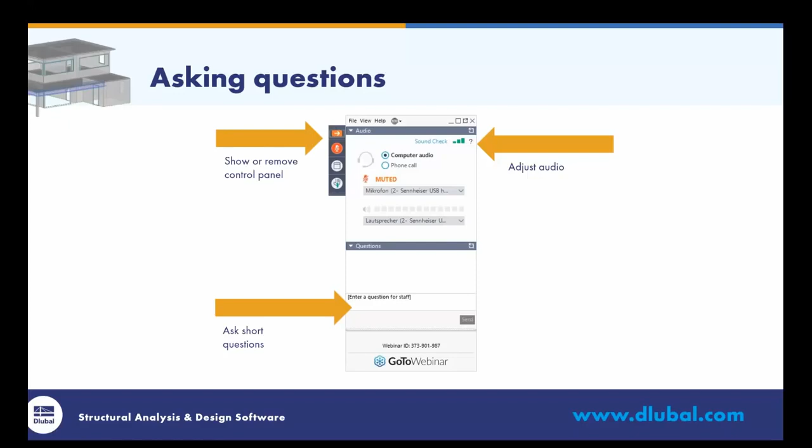So what possibilities do we have for concrete design in RFEM? The first is a big module called RF-CONCRETE. It's actually 2 modules, RF-CONCRETE Surfaces and RF-CONCRETE Members, because of different design concepts. And the member design is also available for RSTAB. Then we have RF-CONCRETE Columns, which does a column design using the method based on nominal curvature, which is also available for RSTAB.

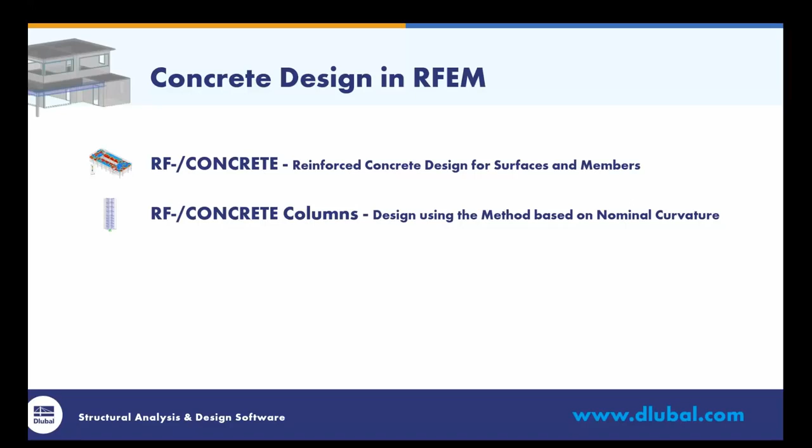Then we have the module RF-CONCRETE Deflect, which is actually an add-on for RF-CONCRETE Surfaces. The next thing would be RF-CONCRETE NL for nonlinear, which can do a physically and geometrically nonlinear calculation of reinforced concrete beams and plate structures. For RSTAB, this is already included in the concrete module. And later on, I will show you designs in the marked modules.

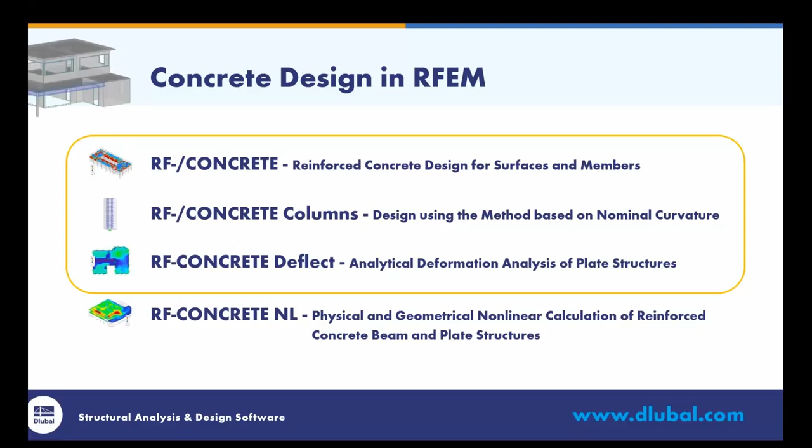What else do we have? We have RF-PUNCH Pro, which does a punching shear design of foundations and slabs with nodal and line supports or columns and walls respectively. Then we have RF-FOUNDATION Pro, design of single bucket and block foundations, which is also available for RSTAB. And the last is RF-TENDON, for the definition of tendons in pre-stressed concrete members, and the corresponding module for tendon design, for a pre-stressed concrete design according to Eurocode 2.

As we have now covered the modules, we can go into the example. You see this building we have prepared. It's completely made from reinforced concrete. We have slabs for the roofs and above the ground floor. Then we have walls for the horizontal bracing. We have some downstand beams to take up the forces from the slabs, they are defined as ribs. Then we have this lintel above a window in the first floor as a result beam, which can integrate the internal forces of the surface into this beam and then be designed as a beam, as a member. And then we have some columns to carry the beam. Of course, we also have some loads.

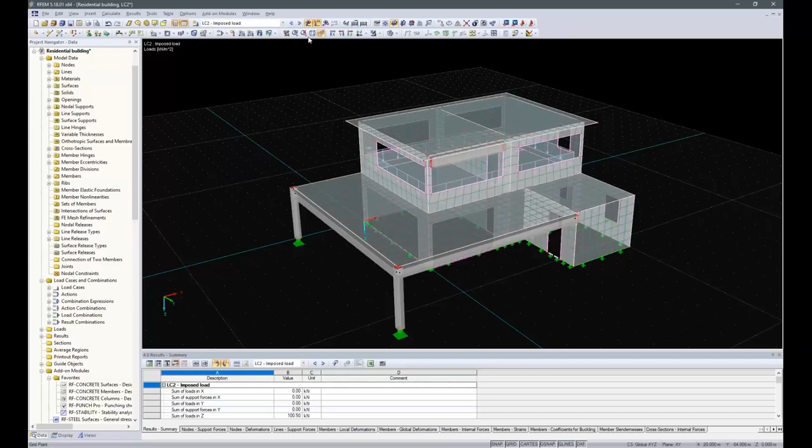We have already done that before because that would be too much for this webinar. We have some self-weight loads in load case 1. We have imposed loads on the internal floor over ground floor. Then we have snow loads on the roofs, wind loads in -x and +y direction.

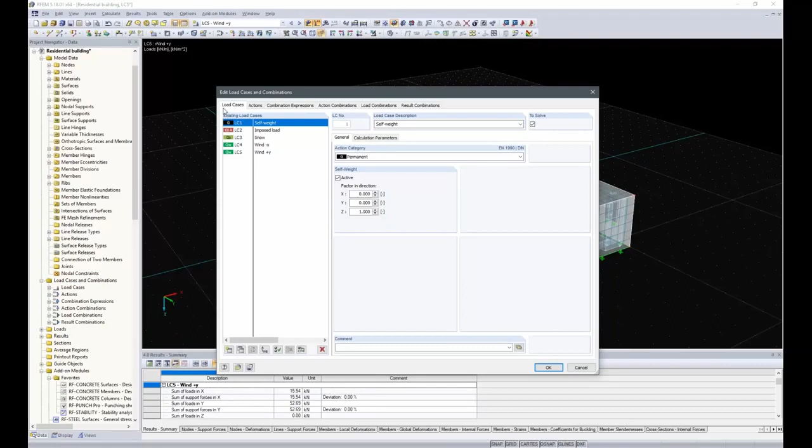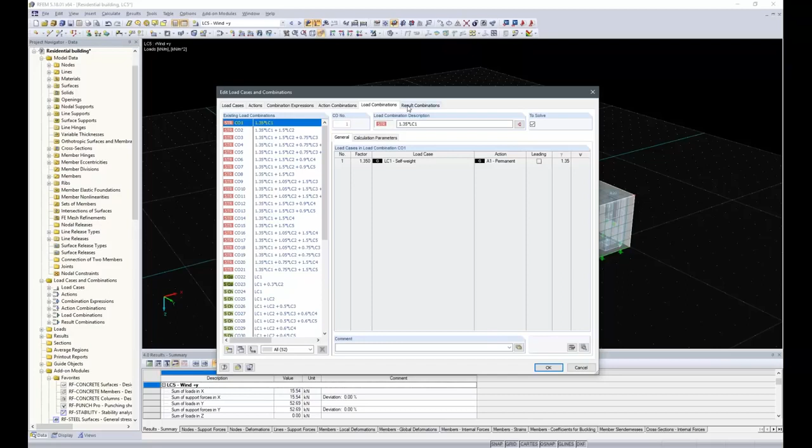So we go into the combinations. You see the load cases, which are then automatically combined, and at the end we get some load combinations for the serviceability limit state and for the ultimate limit state, which are then summarized in 4 result combinations for different design situations for the ultimate limit state and for serviceability limit state characteristic, frequent and quasi-permanent loads.

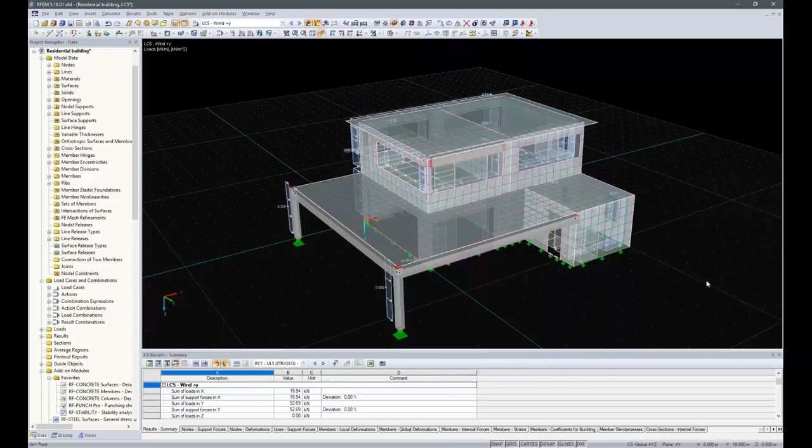Okay. Before going into the design, we will have a quick look at the elements to be designed. First will be the lintel above the window in the first floor. Double click on that to get to the Edit Member window. Here we see the cross-section is a rectangle with 18 centimeters width, because the thickness of the wall is 18 centimeters, and 50 centimeters height, from the top of this window to the bottom edge of the slab.

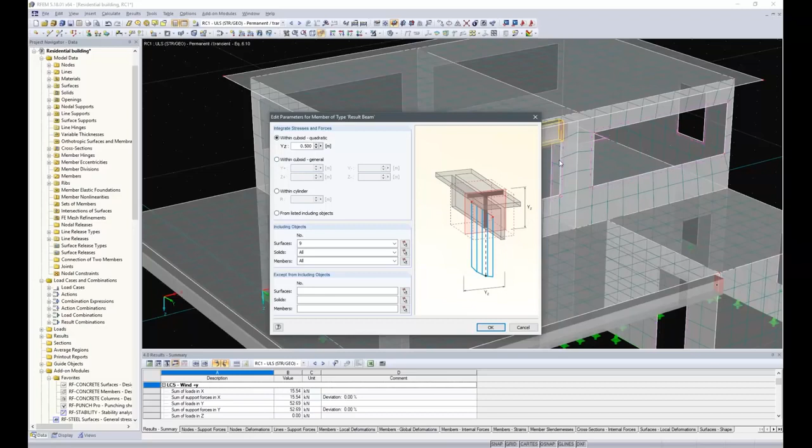And we look into the parameters for the result beams. Here we can edit the parameters and tell the program what to integrate into this result beam, which stresses to integrate. Here the forces come from surface number 9, and in this case with a quadratic cross-section for the integration area. Okay. One more thing, we added an eccentricity to this result beam because it was originally made at the top edge of the window, and so we moved it up by 250 millimeters using this eccentricity.

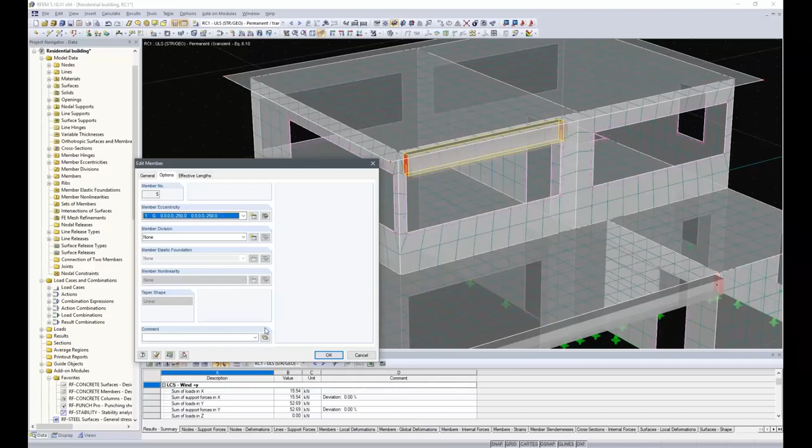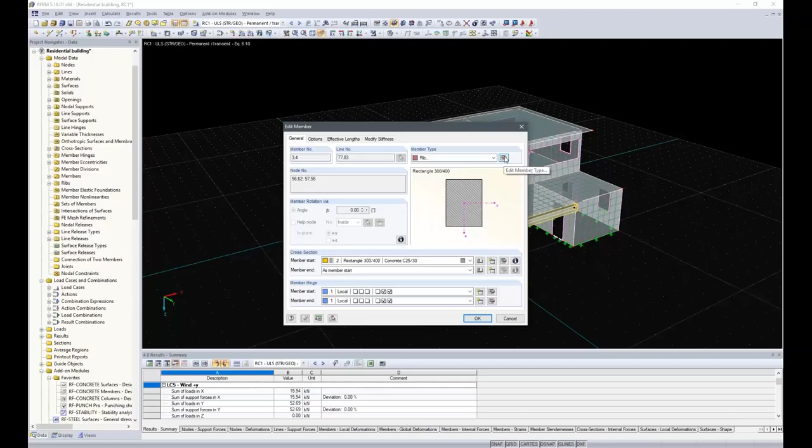Okay. Then we look at the ribs. Here we have a cross section of 30 by 40 centimeters. Concrete is our standard C25/30 concrete according to the Eurocode. And the member type rib also needs some more inputs.

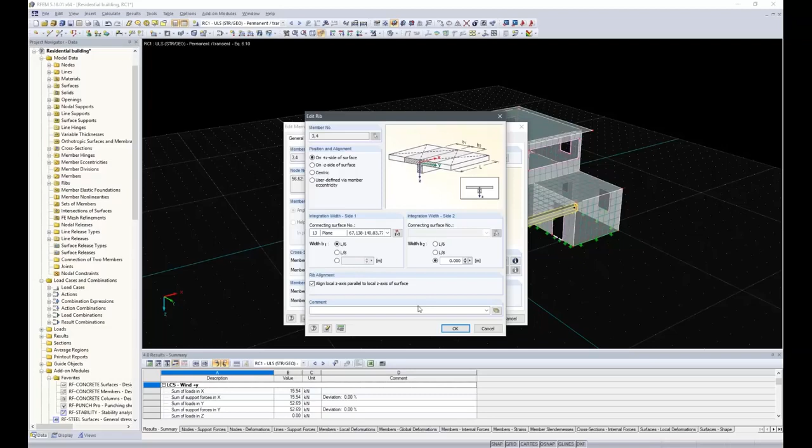We have to define the position of this rib. It has to be on the plus Z side of the surface as per definition in the general data of the model. And the definition of the integration width is supposed to be 1/6 of the length of the member. So L/6. And since it's always on the left side of this beam, it also has to be just on one side. Okay.

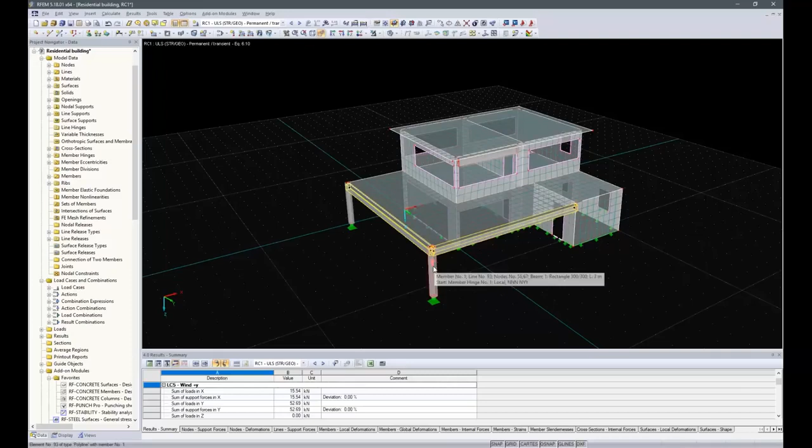So much for the modeling. The columns are on nodal supports and the walls on line supports. That's it so far. Then we can go into the module of concrete surfaces. Double click in the data navigator gets me there. At first I have to select the design standard. Here we want to use the Eurocode 2. We have a couple more standards, and we use the National Annex for Germany, DIN.

Then we have to select the loads for the design. For the ultimate limit state, we use the result combination number 1. And for the serviceability limit state, it's a little more difficult. We use result combinations number 2 and 3 for the characteristic and frequent loads, and we use load combinations number 22 and 23 for the quasi-permanent loads, because the deflection analysis needs an unambiguous position of the loads, which can't be achieved with using result combinations, and that way we have to use the load combinations.

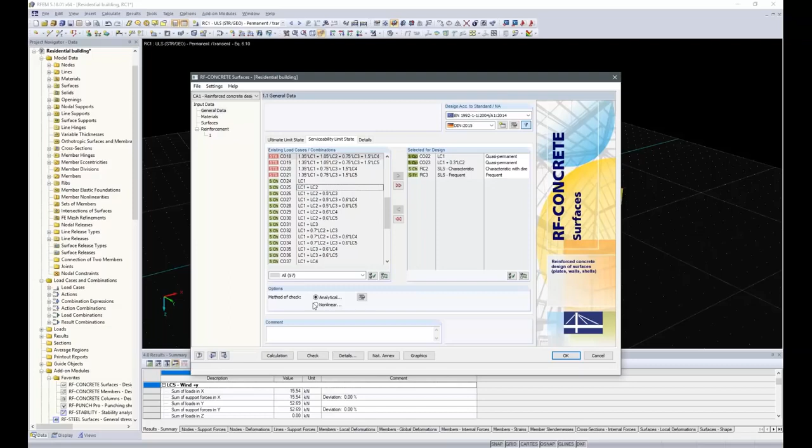Then for the serviceability limit state, we do an analytical design. It's also possible to do a nonlinear design, which takes a little longer, so we stick with the analytical design. Here we can edit the settings for this design and tell the program which checks to do. We want to do crack check, steel stress check, and we want to have a look at the deflections using the add-on RF-CONCRETE

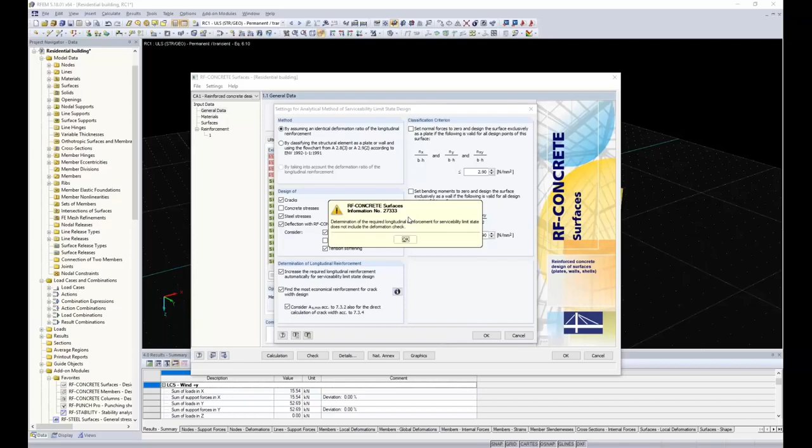Deflect. I check that, and I get a warning message that the required longitudinal reinforcement for the serviceability limit state does not include the deformation check. So for the deformation, you have to add reinforcement by putting in higher basic reinforcement, or even go with bigger dimensions for the slab. Okay, we also consider shrinkage and click OK. Then we go into the materials, table 1.2.

Here you see the concrete C25/30 that is taken over from RFEM, and we have a couple of different reinforcing steels, always depending on the standard you're using. Here we stick with the default reinforcing steel B500S, and go on to the next window, surfaces 1.3. We have various options for also more or less unusual design situations, and we will not cover them all in detail. I'll just give you a quick overview over what we can do. We just keep the defaults for creeping and shrinkage.

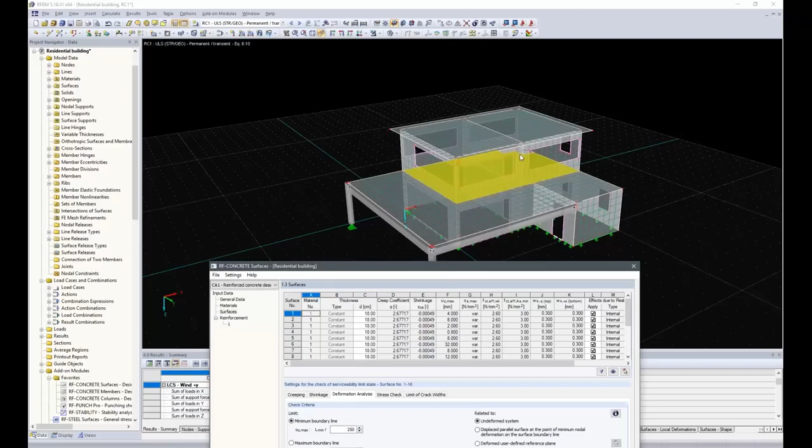We have to have a quick look at the deformation analysis, because here you can go wrong regarding the design ratio. Since here the default value is using the minimum boundary line divided by 250, and since the shortest boundary lines are back here, it makes it a little difficult to get a correct ratio, because this is very small. So we go with a user-defined relative limit and define a length of the shorter dimension of our two-way slab, which has a length of 5 meters, which is then divided by 250, and that is our limit for the deflection design. So that's a lot better.

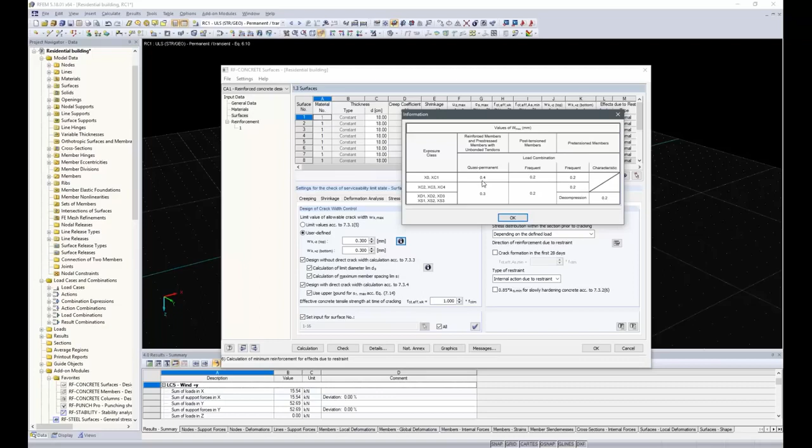Then we go on to the stress check, and we just keep the defaults here. Next is the limit of the crack widths. Here we want to use a user-defined limit. Click on the info button and get a small table. We have an exposure class XC1, and for reinforced members with a quasi-permanent action we use 0.4 millimeters. So we can enter that. Then we want to do the design with a direct crack width calculation using the equation 7.14. And also we want to consider the restraint, in this case with the approach of a bending restraint, because the slab is mostly exposed to bending.

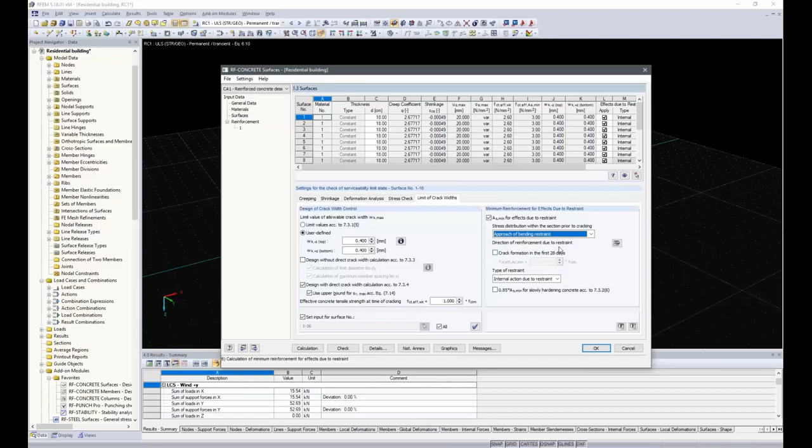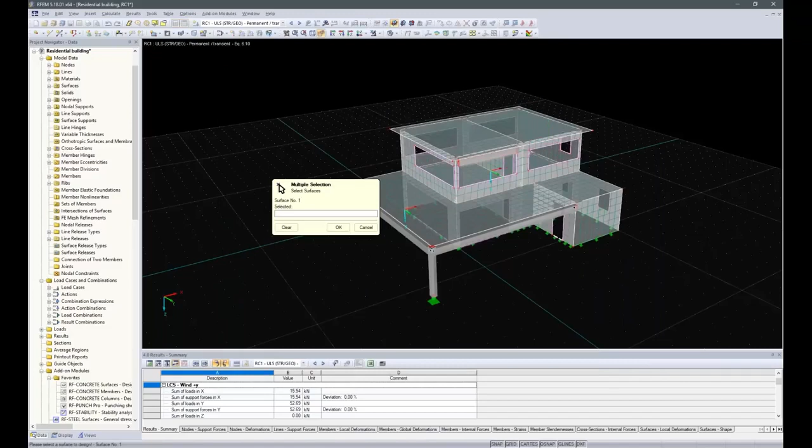Then we can go on to 1.4 reinforcement. Here we have to select which surface we want to design. In this case, it's just supposed to be the internal surface over the ground floor. This one. Click OK, and now the reinforcement ratios are already pre-selected to match the standard, so we don't touch that. Then we can have a look at the reinforcement layout. We want to have the concrete cover for the reinforcement according to the standard, using the exposure class XC1 for top and bottom, and get these minimum covers for both directions.

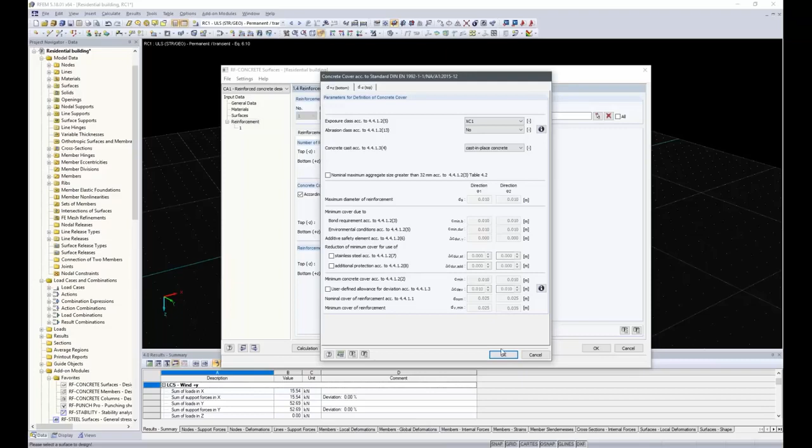Okay, and we go to the next tab, longitudinal reinforcement. Here we have the possibility to enter a basic reinforcement for the whole slab. Also, it's possible to use the required reinforcement for the serviceability design, which we are going to do in this example.

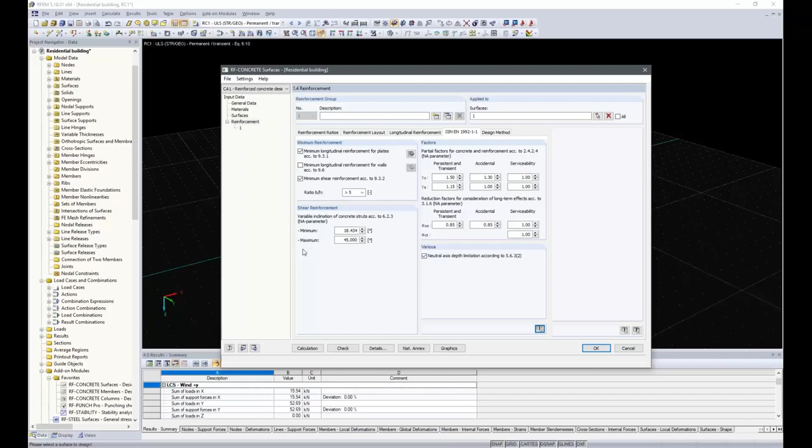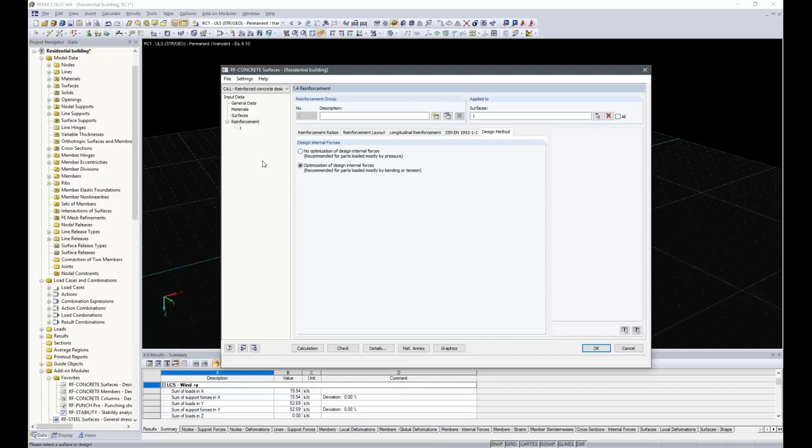Now we can go on to the next tab for the standard. Here we check if we want to use a minimum reinforcement for plates or walls. In this case, it's for plates. The partial safety factors for the concrete and the reinforcement, and the inclination of the concrete struts, all according to the national annex. And the last thing is the design method. For this example, we want to use the optimization of design internal forces because our slab is mostly loaded by bending. If we have walls, for example, it's not recommended. Okay, we are done with the inputs and can do the calculations.

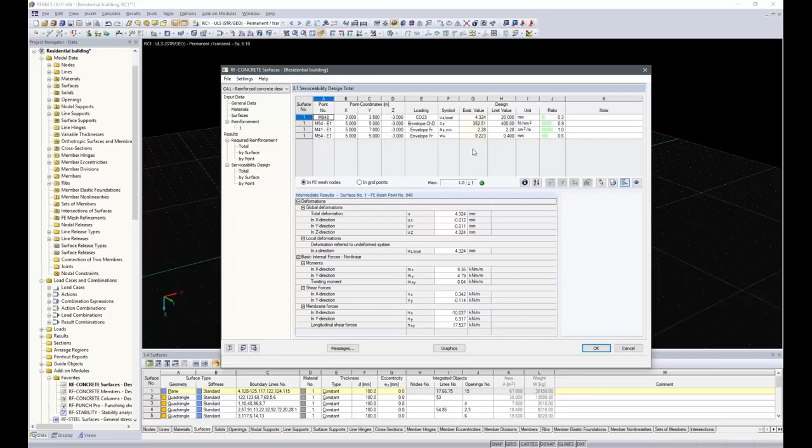Okay, if we want to see some more, we go into a visibility mode to just see the slab. Now we see the crack width. But first I want to have a look at the reinforcement.

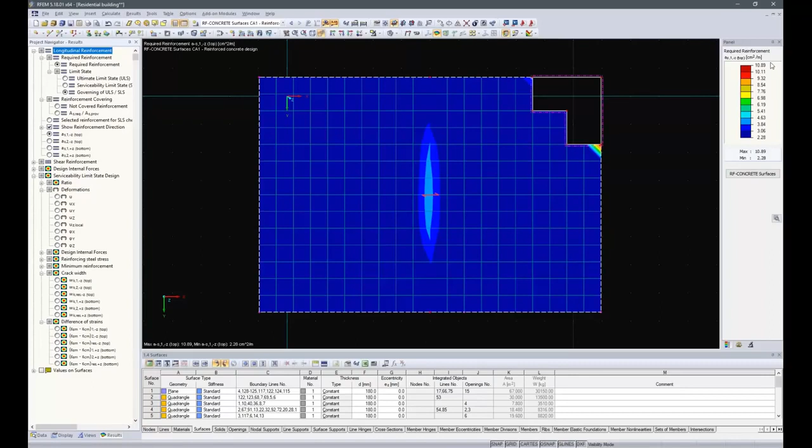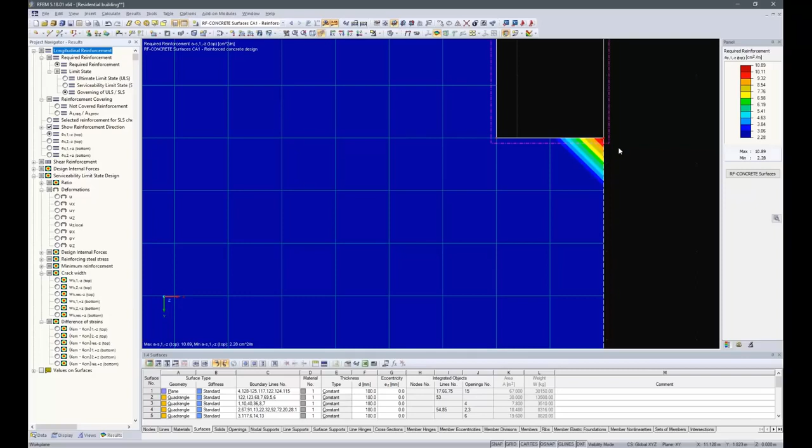For the top reinforcement, we get quite high values of up to almost 11 square centimeters per meter, but this is just in this one corner, so it's probably a singularity. You can find articles on how to deal with singularities in the knowledge base on our website. I'll show you at the end of the presentation where you can find that. In the other direction, we have the same problem in a different corner, but with the right means, you will be able to cope with them.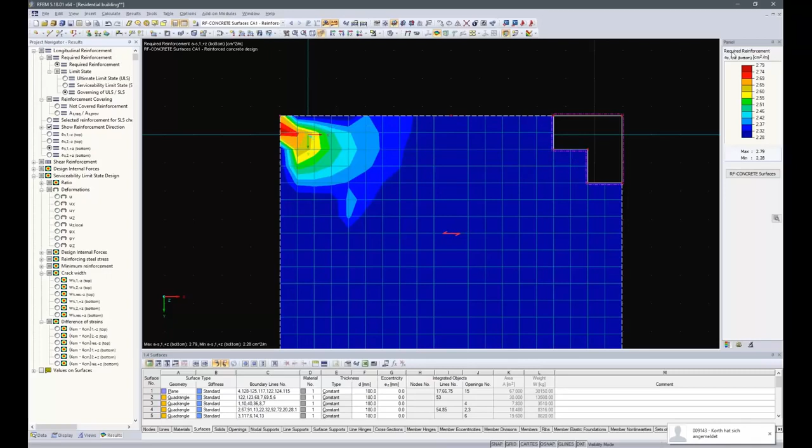Then on the bottom, we have not even 3 square centimeters per meter in both directions. Here is even a singularity, so you can do with a quite small basic reinforcement and cover all the required reinforcement.

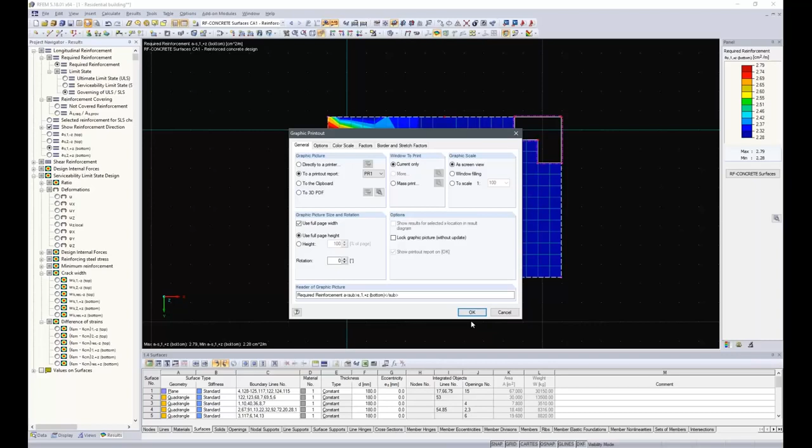For example, it's possible to print this graphic into the printout report using this button up here, print graphic. Then you can select where to print it, either directly to a printer, to a 3D PDF, to a printout report, or to the clipboard to use it in another program. And you can select how you want to print it, with this color scale, with factors, and so on. So just go ahead and experiment with that to get the right thing for you. Oh no, I didn't want to make a printout report now, but I want to go ahead

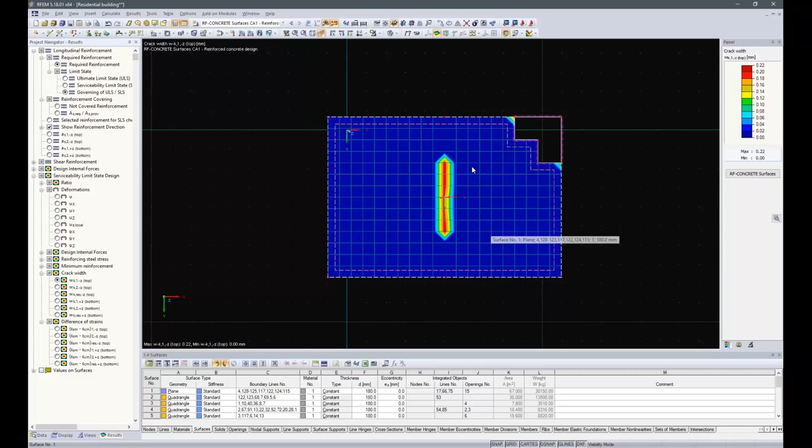and have a quick look at the crack width. The maximum crack width is on the top of the slab over the wall, so this is what I expected, but since it's way below the maximum value, it's still fine. The other directions are even smaller, and on the bottom we don't have any cracks, so that's fine.

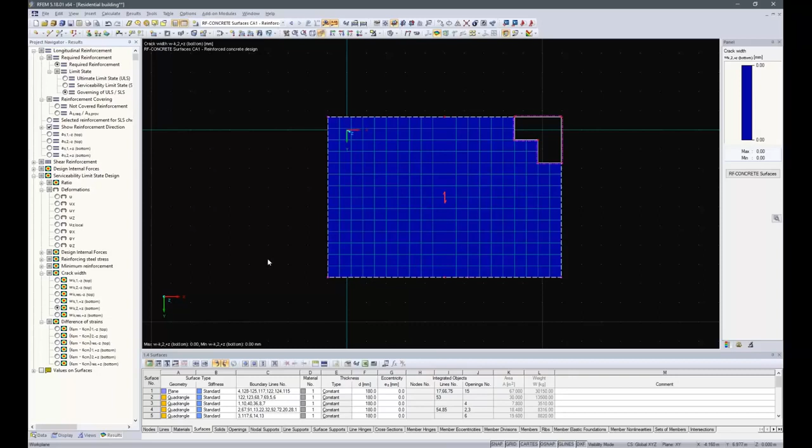So that's been a short insight into the module RF concrete surfaces, and we go ahead and look at the module RF concrete members.

So again, we have the general data. Looks pretty much like in RF concrete surfaces. We have to select the standard. We use again the Eurocode with the national annex for Germany. Then the result combination number 1 for the ultimate limit state. Result combinations 2 and 3 for the serviceability limit state, and combinations 22 and 23 for the deflection.

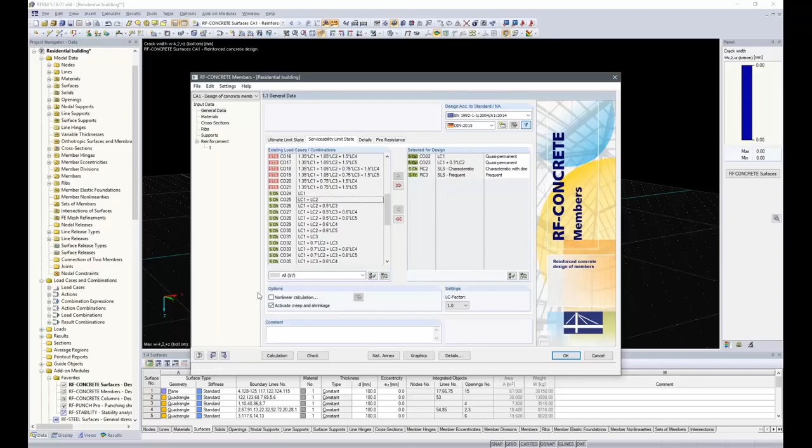We want to activate creep and shrinkage for the calculation, and we don't want to do a nonlinear calculation, so we leave that out and go on to the next window, materials, again taken over from RFEM, so we can just skip through that.

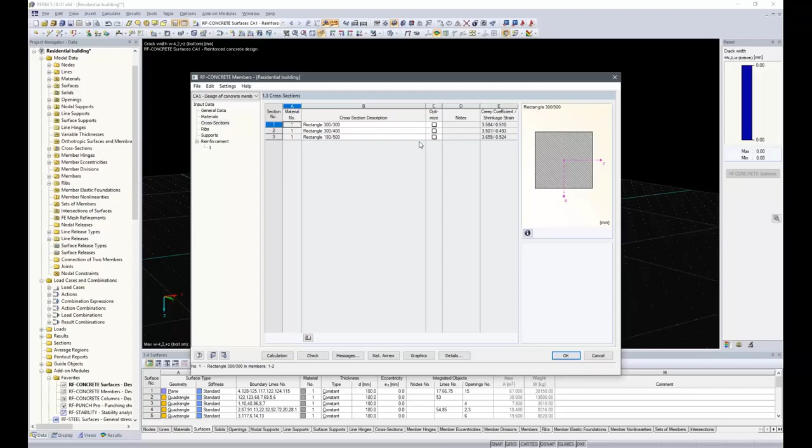To the cross sections, here you can change the cross sections if you need to, if you want to. You can optimize it, let the program optimize it for you, and you can modify the creep coefficient and the shrinkage strain.

The same goes for the ribs. You can also modify creep coefficient and shrinkage strain, and you can modify the effective width for the ribs.

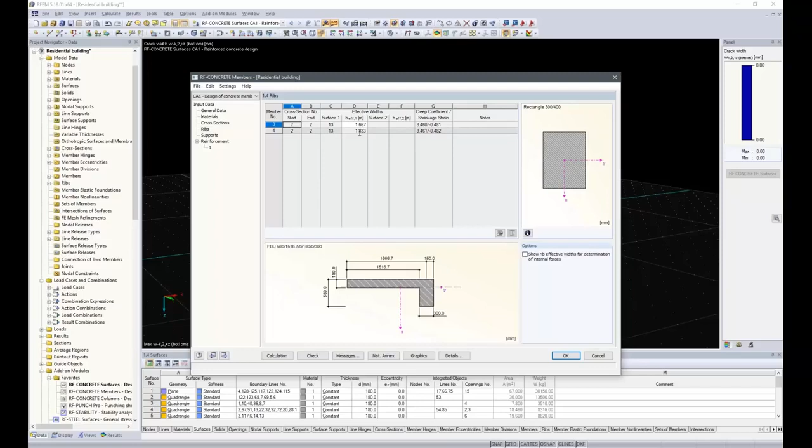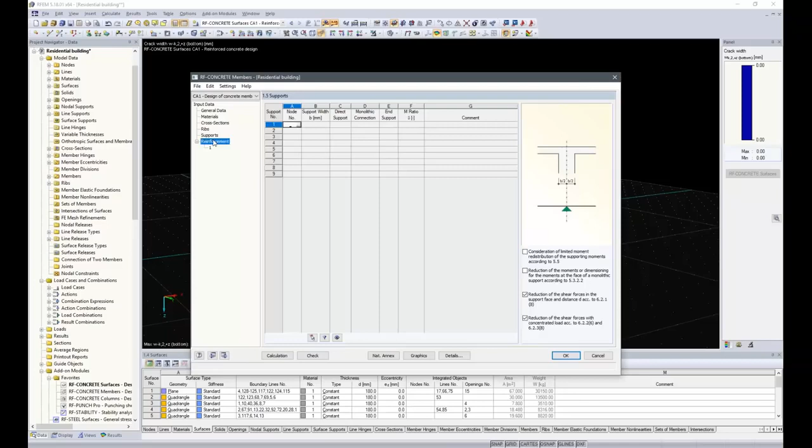The next would be inputting the supports for the beams. They have to be done if you want to do a moment redistribution or you want to do moment reductions over inner columns, for example. Or if you want to reduce the shear forces according to the standard, then you have to input supports. We're not going to do that now to get quickly through that.

And then we get to 1.6 reinforcement and have to do some additional inputs here. At first we make a reinforcement group for the ribs, this one and this one, edge beams, and we want to select the corresponding beams, this one and this one, 3 and 4, and give them something to do. Okay, the possible diameters for these ribs will be 16 and 20 millimeters. These two beams are going to be quite densely reinforced, so we give them another layer of reinforcement bars.

Also, it's possible to add some curtailment to optimize the design, but we are not going to do that in this example. We go ahead to the stirrups. Here the possible diameters will be 8 and 10 millimeters.

Here it's possible to define the stirrup spacing related to zones subdivided according to spacing, or with a self-defined spacing, but we stick with the uniform spacing throughout.

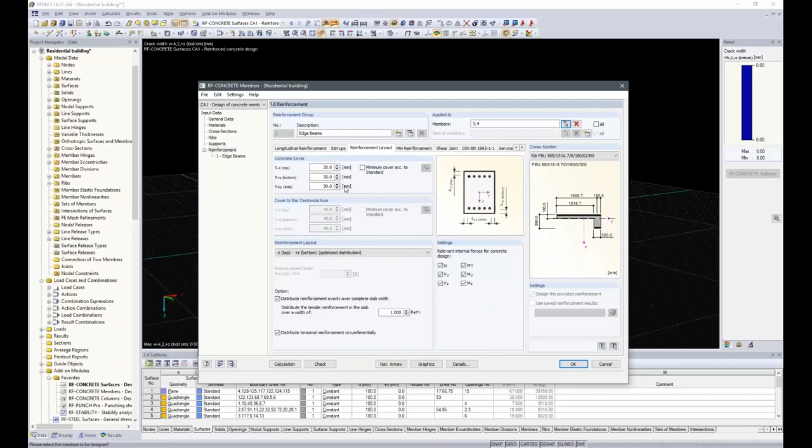Next is the reinforcement layout. Like before in the surfaces, we go with a concrete cover according to the standard and can select the exposure class. In this case, this is XC4 for exterior building elements with direct rain, so this is a lot more minimum cover for the reinforcement. Same goes for the top and for the sides.

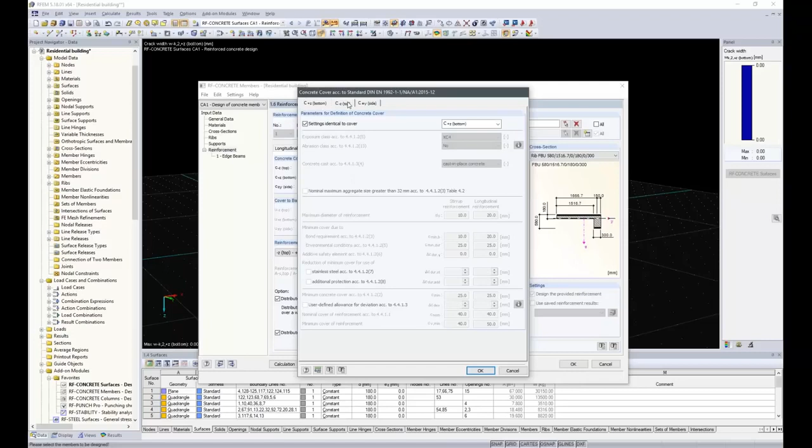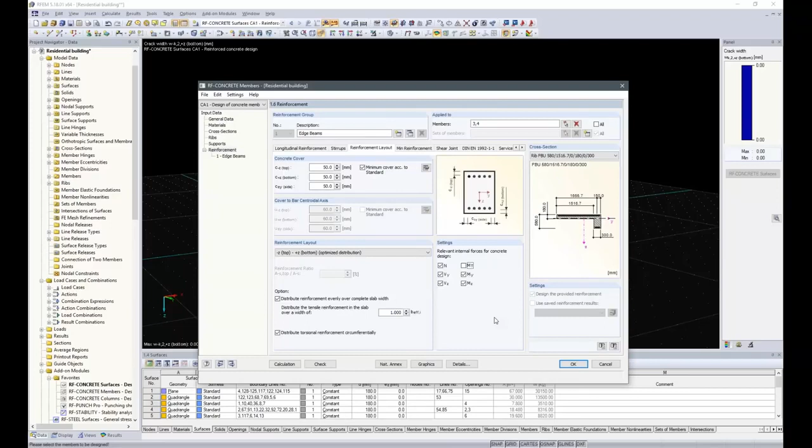Okay, we leave the reinforcement layout itself alone, and we turn off the torsional moment, because here we have only compatibility torsion, which doesn't have to be taken into account according to the standard. Then we go on to the next tab, minimum reinforcement.

Here we can define if we want to use minimum longitudinal or shear reinforcement, and if we want to have a certain amount of reinforcement, we can also define that up here. Then we want to have a shear joint for the design.

The slab, for example, comes as a prefabricated ceiling with 30 millimeters support on the beam. So again, just on the left side, like in the picture on the right, it's 30 millimeters and a rough surface. And we also want to design the flange connection of the segmented cross sections.

The next is again the code, the settings for the code. We leave that according to default and go on to the serviceability.

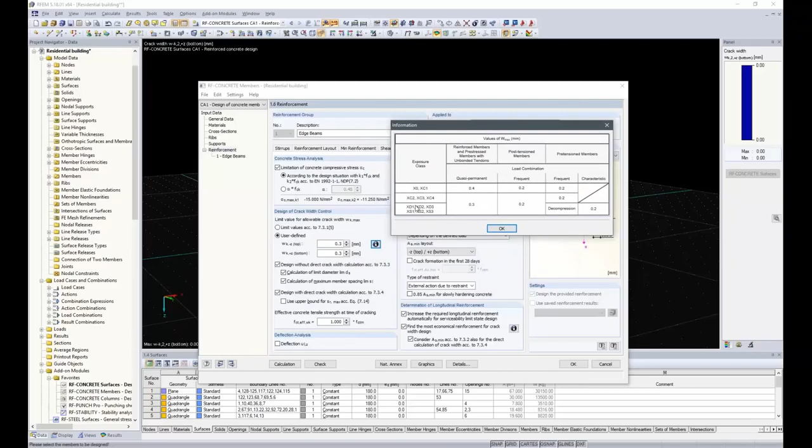Here we want to do a design for the concrete stresses, for the steel stresses. We want to do a crack width design, again manually defined. It's XC4 now, so we have to use 0.3 millimeters maximum crack width, which is already entered.

And we want to do a direct crack width calculation using equation 7.14. Also, we want to do a deflection analysis, and we want to get a minimum reinforcement for effects due to restraint.

In this case, depending on the defined load, the minimum reinforcement layout is supposed to be on the tension side. And of course, we want to increase the required longitudinal reinforcement automatically.

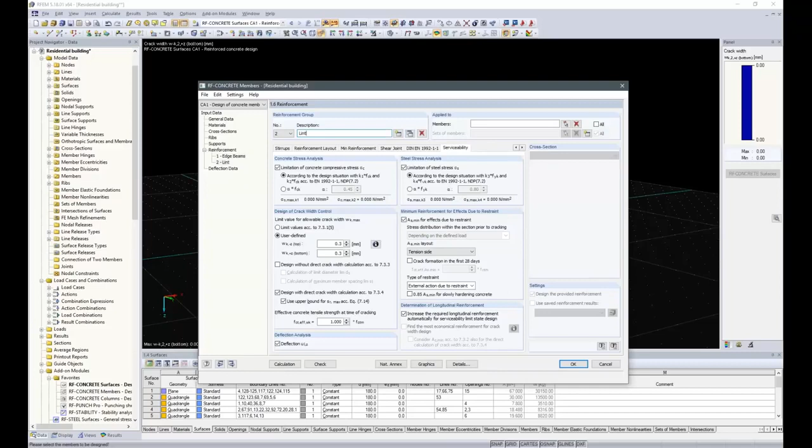Next, we define another reinforcement group for our lintel. For doing that, we just copy the current reinforcement group, call that lintel, and select this beam, number 5.

The only thing we have to change is that we can't do a deflection analysis for this result beam, because this result beam doesn't have an own stiffness and is not coupled to the system. So this is a small limitation concerning the result beam, but on the other hand, it's quite a handy tool.

So we turn that off, and we want to have a little smaller possible diameters for this lintel, because the loading is much smaller and it's much shorter than the edge beams.

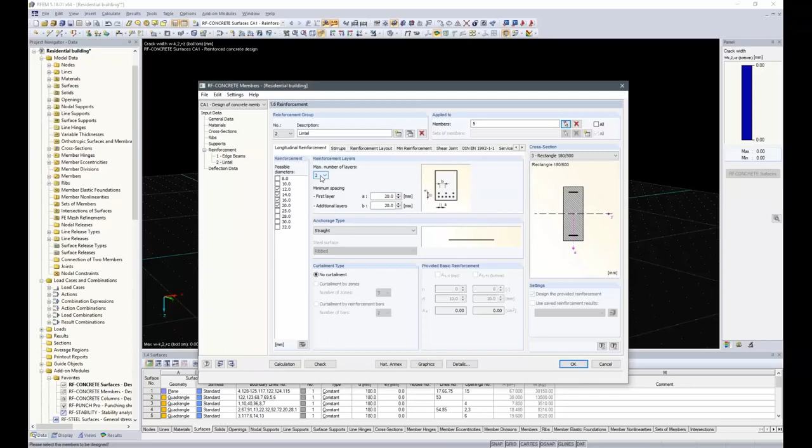The last thing we have to enter in this module is the deflection data for members number 3 and 4. For the edge beams, distance between supports is automatically recognized, and the limit value is length divided by 250. We can go on with that and start the calculation.

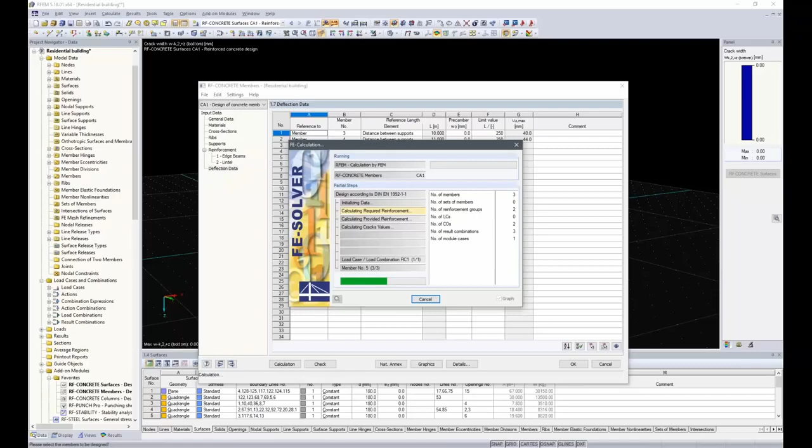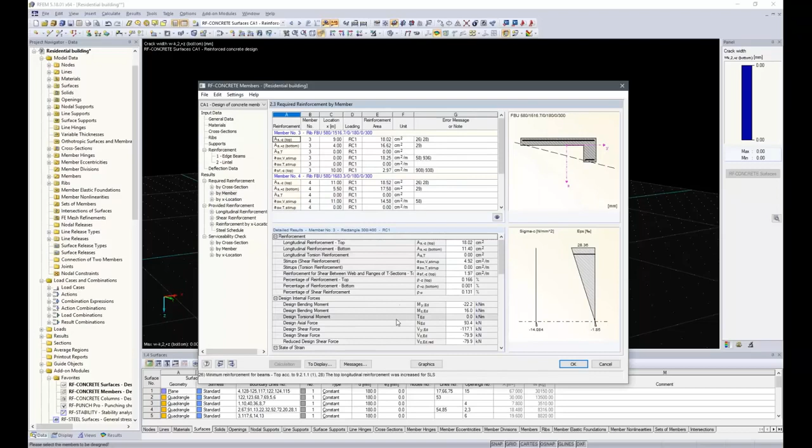Okay, now we get required reinforcement by cross-section, by member, always with detailed results in the bottom box, and we get provided reinforcement. In this case, we have the shear reinforcement for the different members.

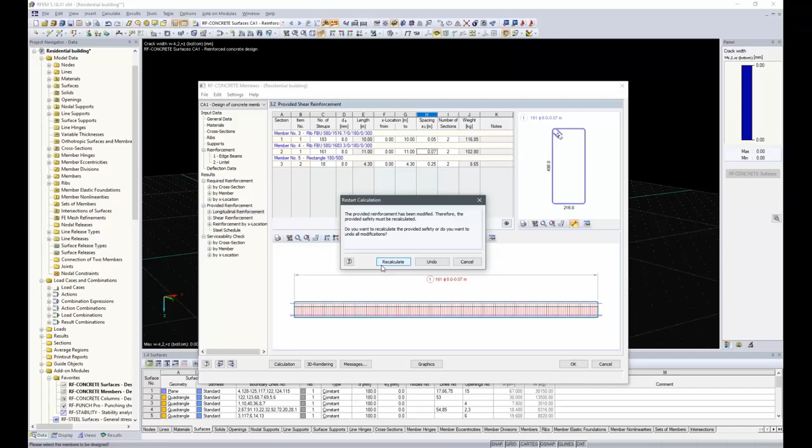Now the program asks me to recalculate the module with the new reinforcement to prove that the design is still valid. So I recalculate that, and now I can see that this has changed. I have 2 more stirrups, and it's now like I wanted it beforehand.

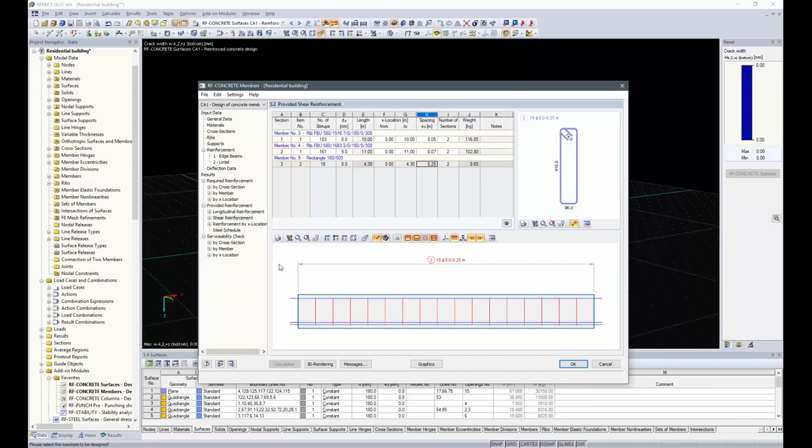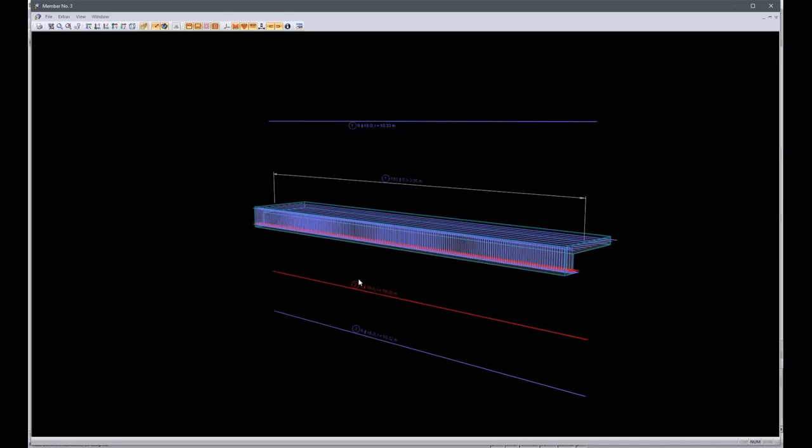I go into the longitudinal reinforcement and see that it's quite a bit of reinforcement. If you double click on the graphics in the module, then you get this bigger window. You can also print that graphic.

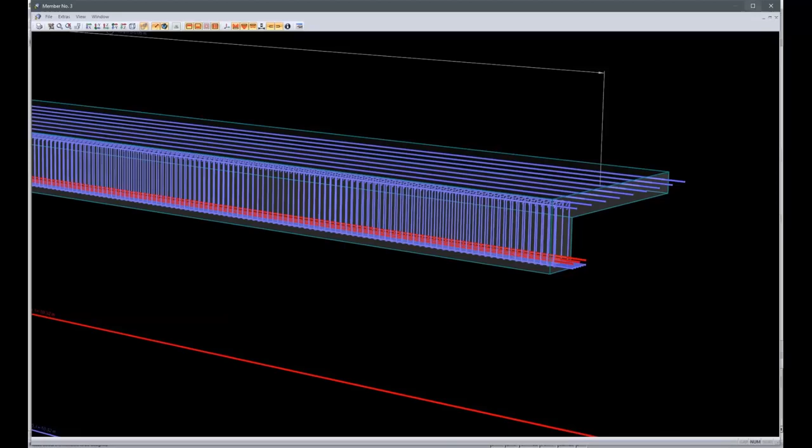You can edit the reinforcement just as you need it. You can even copy it, delete it, do anything you need. You can do the same in this window up here in this table, although that might be a little more difficult because you don't see what you do. That's why it's maybe better to use this graphics window.

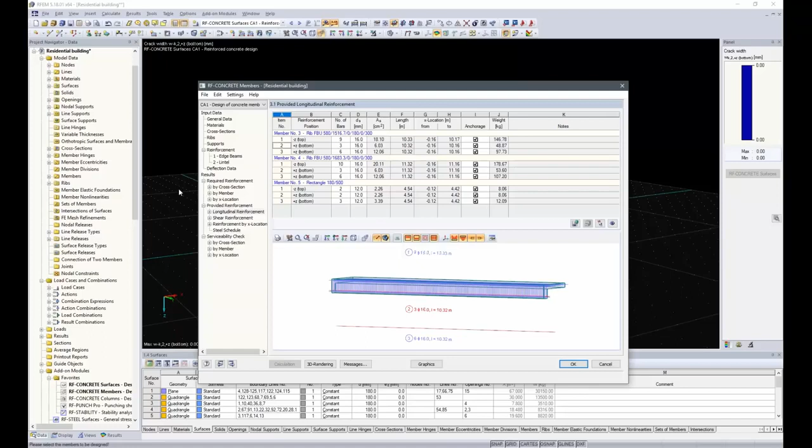Okay, I go into the serviceability check. All the required checks are okay. We are at 98% maximum capacity, so this is actually quite good design, meets the requirements. Just so it's okay.

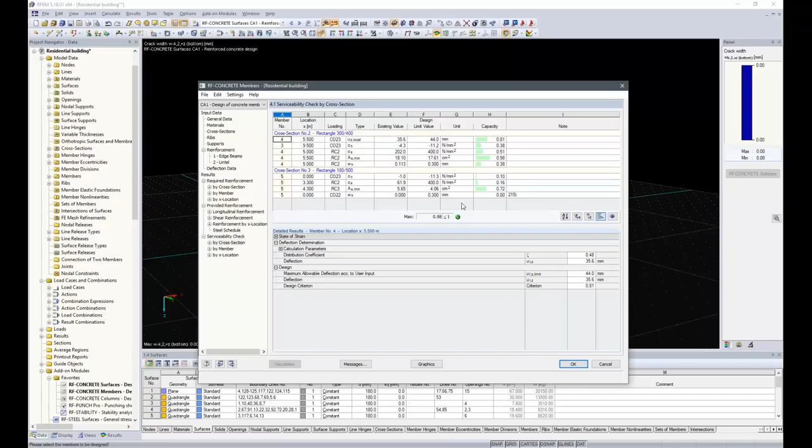And then we can look at the results in the graphics window. You already see it here. Let's pick some just that member and look at that more closely.

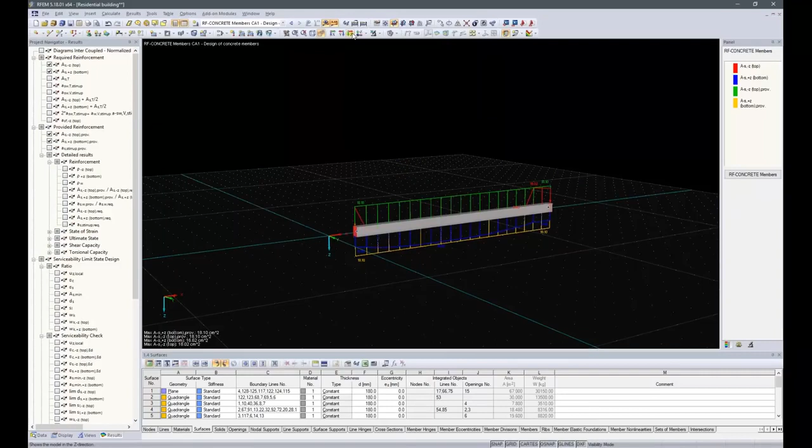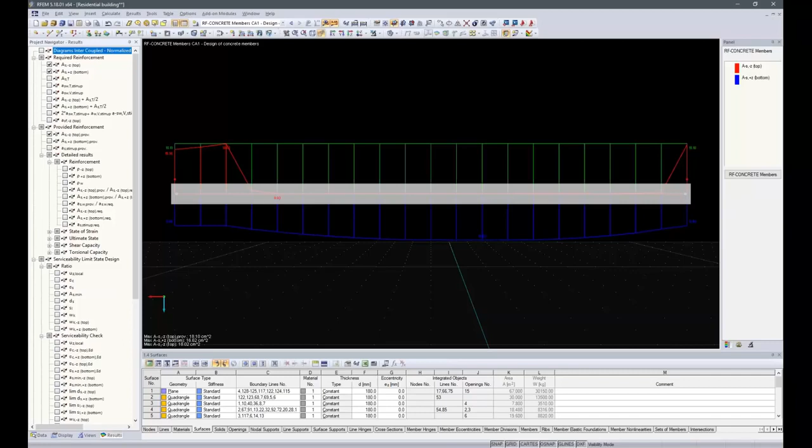Okay, I turn off the provided reinforcement. Now we get the required reinforcement with maximum for the bottom reinforcement in the middle, which is just as I expected, and the maximum values for the top at the ends. So that's also as expected. And then now we can again add the provided reinforcement, and it's just a little bigger than the required reinforcement, so this is okay.

Without the curtailment, I get the same reinforcement over the whole length of the beam. This could of course be changed in the module, enter curtailment, and optimize your design.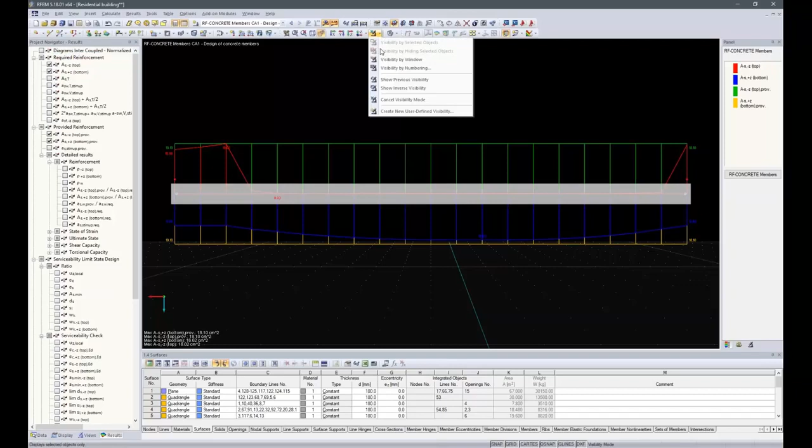So that's been a quick look into the member design. I go back to a view of the full graphics, cancel the visibility mode, show the whole model, and go into the column design.

Next module - again, all the modules are similar, so you get used to that very fast. First I have to select the members in this module, and I can click on all. Only the vertical members are recognized as columns by the program, so only members 1 and 2 are selected for design. I have to select the design standard, again Eurocode 2 with a German annex.

For these columns, I just have to do an ultimate limit state design, but I have to select a creep-producing permanent load. That would be, for example, combination number 23 with the self-weight and a part of the imposed load for the quasi-permanent load.

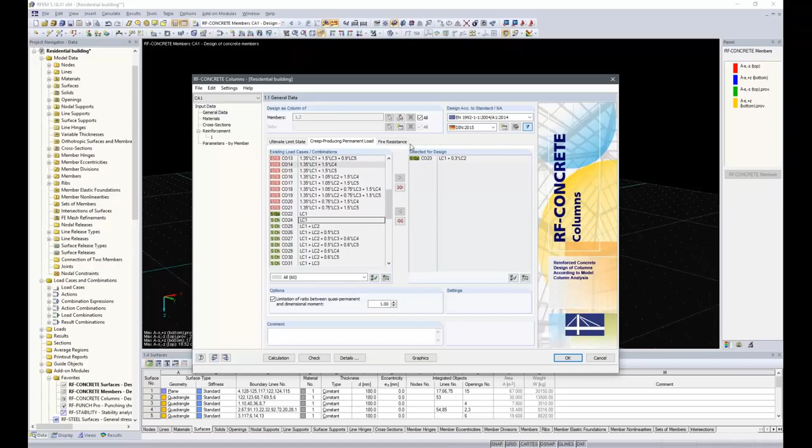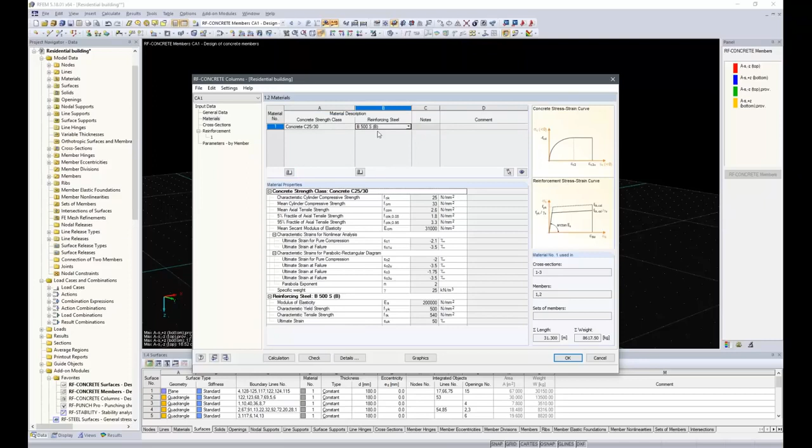It's also possible to do a fire design, but we're going to skip that for this example. I go on to the materials, and same as before, concrete is taken over from RFEM, reinforcing steel can be selected. We go on to the cross sections.

Again, I can change the cross section in here and have to give it back to RFEM later on. I can change the creep coefficient, and I go to 1.4 reinforcement.

Here it's again similar to RF-Concrete Members, and I want to have possible diameters from 12 to 16 millimeters. I want to have a uniformly surrounding reinforcement layout. Everything else can be left as it is. For the stirrups, I use 8 or 10 millimeter diameters.

Anchorage type hook, and 2 legs is okay. I can define secondary reinforcement, although this user-defined maximum reinforcement distance comes from the standard - Eurocode 2 - that's defined in there.

And then I can go for the reinforcement layout. Here I want to have the cover according to the standard again, so XC4 for exterior building elements with direct rain.

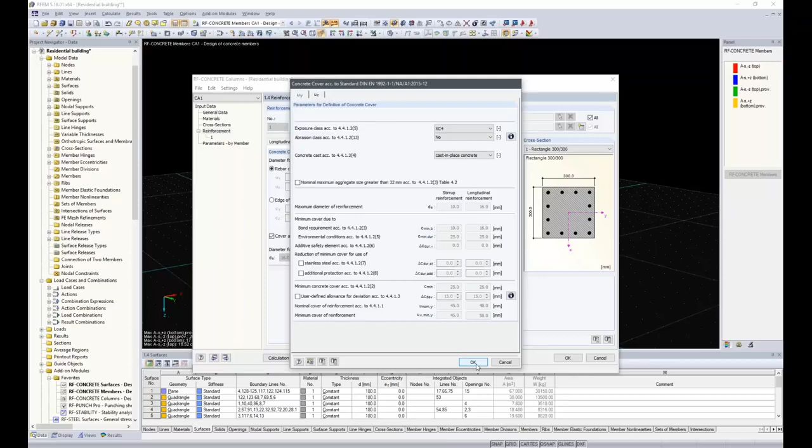And I go on to the standard settings. Yeah, nothing new - maximum, minimum reinforcement - and we keep that.

The last thing I have to define is the parameters for the stability check. In this case, this would be buckling about axis Y and axis Z. We have a braced model, so the column is held on both ends, and the buckling length coefficient is automatically determined. It's 1 for these two columns, and we can just go ahead and calculate that.

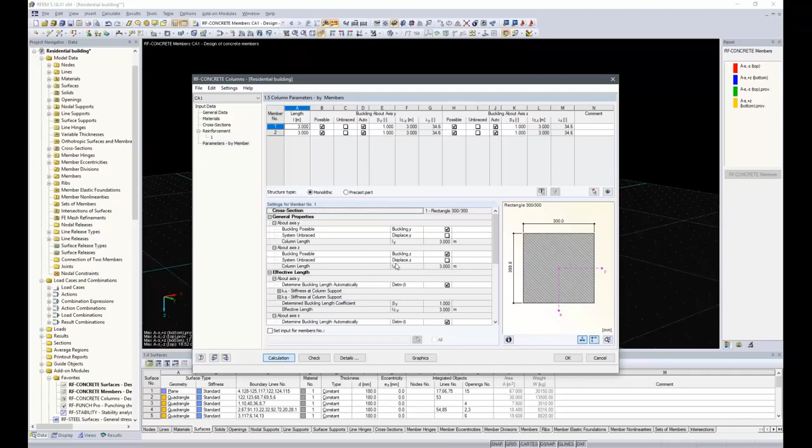Okay, we have a maximum ratio of 0.15, so 15%. That's basically nothing, and we can just look at the required reinforcement by cross section. That's minimum reinforcement.

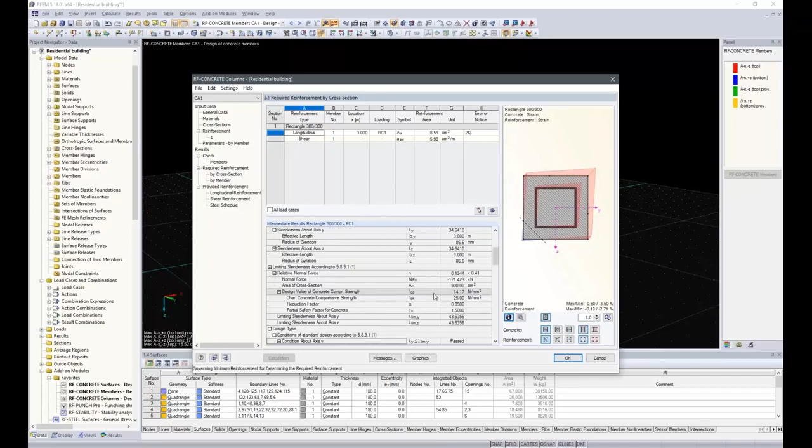You can look at all the intermediate values for the column, and then we go into the provided reinforcement. Okay, it's not much - just 12 millimeter diameter, one in each corner. So that's easy. You can also adjust your reinforcement to meet your needs.

Now we needed 0.59 square centimeters. We have 4.52, so that's a lot more than we need.

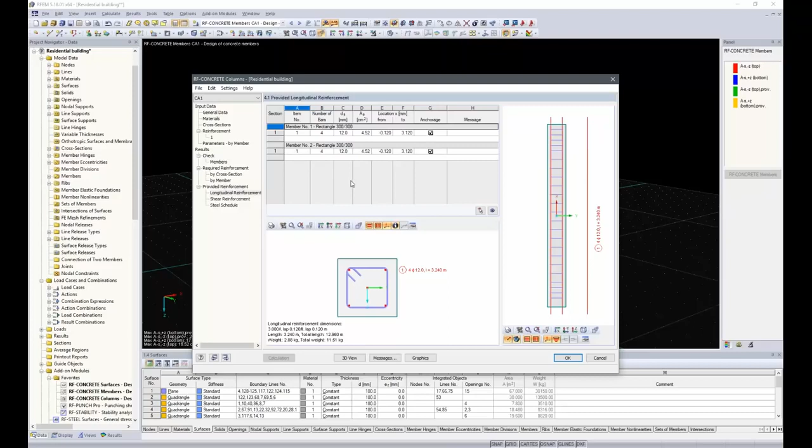We can look at that in the graphics window again, and we have the required reinforcement - here it's a little more - and the provided reinforcement compared to that. So that's okay, we have done the design.

Yeah, that's it for the presentation. We have covered the basics of the concrete design using Dlubal products. There is still a lot more that can be done regarding the design of concrete elements.